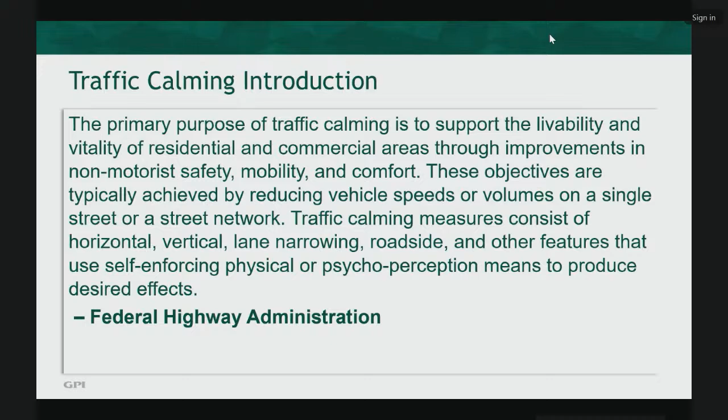I just want to take a moment to start with a brief introduction to traffic calming. Up here is a definition by the Federal Highway Administration on their definition of traffic calming. Different agencies will give a varying definition, but in essence, what I like to synthesize is that traffic calming is the different techniques or methods of slowing vehicles down within residential and commercial areas. The reason why we want to do this is for safety reasons. The Federal Highway Administration has extensively done research and proven that based on vehicular impact speeds to pedestrians, the higher the speed, the greater the impact and injury to the pedestrians.

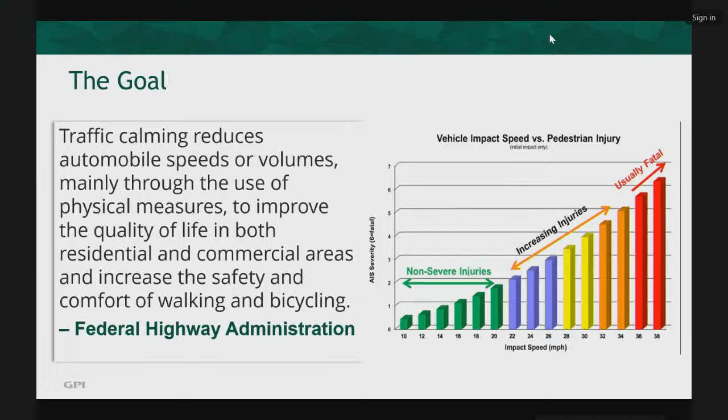So for this project, the process starts with identifying our project limits. From there, we gather our existing data and then use a metric to evaluate the data, and from there, we assign priorities to locations using the data, and then evaluate all the different traffic calming strategies. From that pool of strategies, we provide recommendations for each location based on our findings.

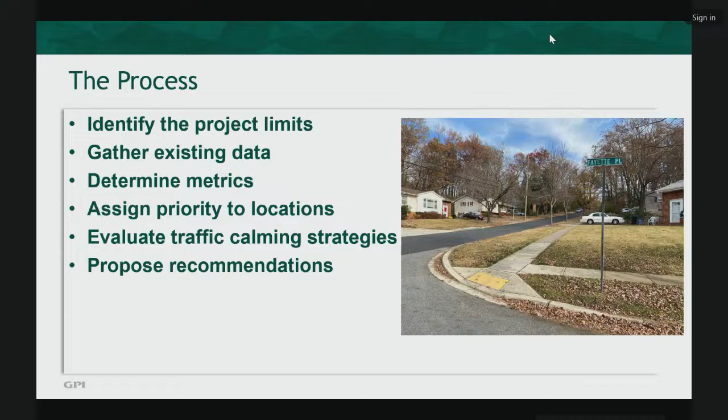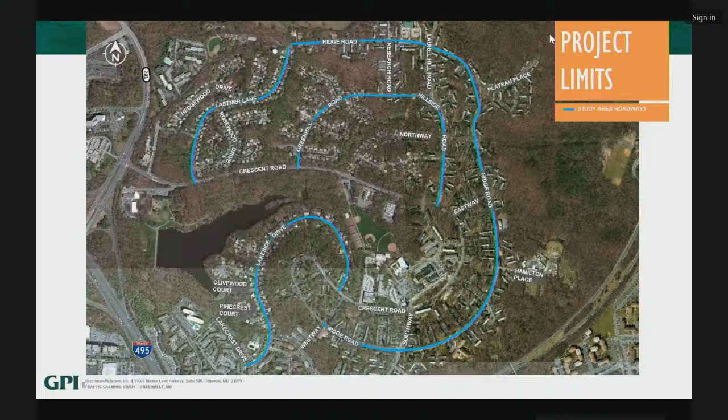As I mentioned earlier, our project is along Lastner Lane, Green Hill Road, Hillside, Lake Crest, and Ridge Road. In this slide, you can see all these roadways outlined in blue. From there, we broke it down into modular pieces and used an alphanumeric ID to assign locations, identifications to further evaluate in this study. We start with 4A and end with 8B.

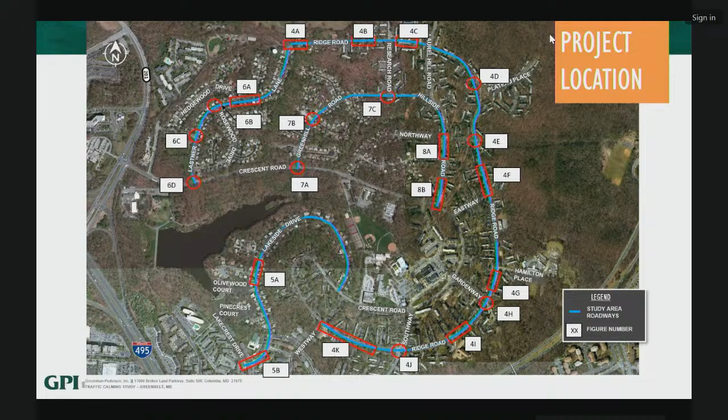This slide represents the data we collected for our research. We laid down automatic traffic recorders, or ATRs, along the different roadways to collect the average daily traffic, or ADTs, and the 85th percentile speeds. The ATRs can be identified by red lines along the blue roadway sections with callouts to their respective ADTs and speeds.

The 85th percentile speed is the observation of vehicles traveling along this section of roadway where 85% of drivers were driving at or lower than the speed posted. So if the speed was 29 miles per hour as our 85th percentile speed, that would mean 85% of drivers through this section were going at or less than 29 miles per hour. It is not the average speed.

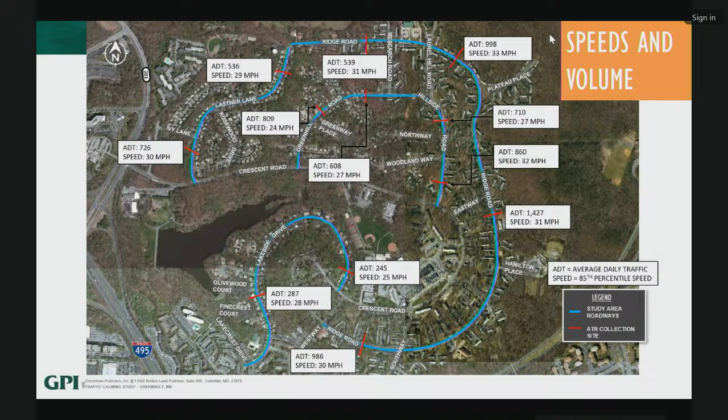This slide represents the number of collisions collected over a 4-year period from 2019 to 2023. The data was provided to us by the City of Greenbelt, organized based off reports and the addresses where incidents occurred. Locations can be identified with red circles, where collisions happened at intersections, or along stretches of roadways outlined in red. These collisions vary from pedestrian injury to property damage and hit and runs, and are lumped together along these red sections of roadway.

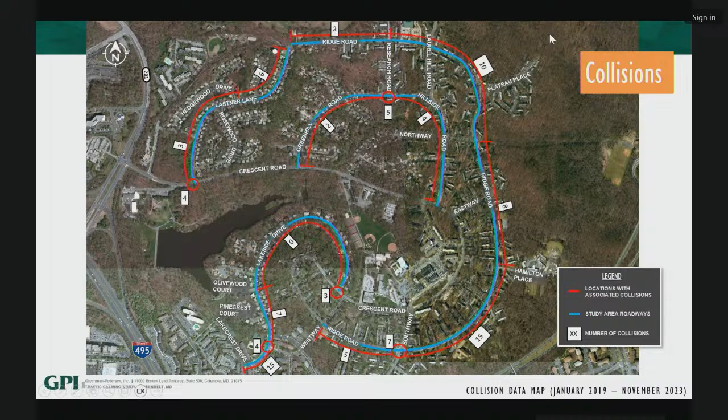Question on that page? Sure, so it looks like on the previous one... so that's the 85th percentile travel speed. So that doesn't take into account what the speed limit was at all. Or are the speed limits the same on all the study stretches? Okay, so there's no differential there then. Okay.

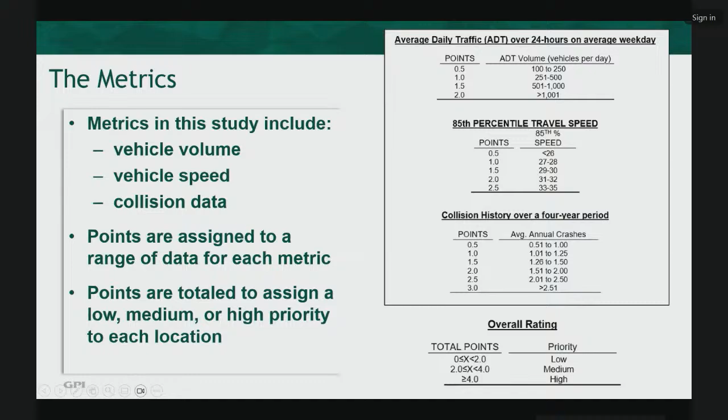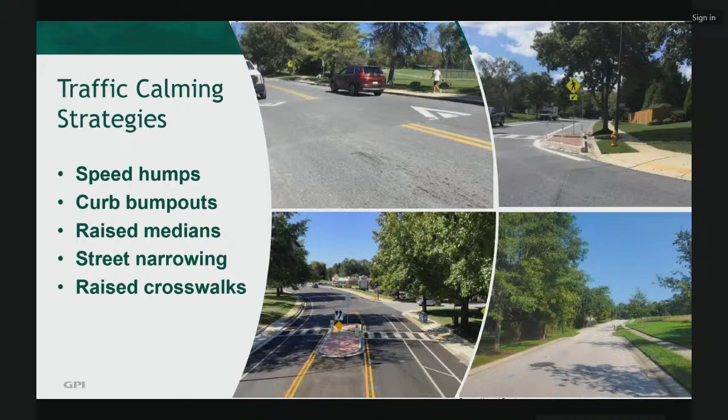Here we're recommending we reduce the lane widths along Ridge Road to allow drivers to travel at slower speeds, because wider roadways tend to promote higher speeds of travel. With roadway narrowing, drivers tend to be more cautious. In addition, we're also trying to realign the existing crosswalk that is currently at a diagonal direction, since it's much more conducive to pedestrians if they walk in a perpendicular path.

In combination with that, there would be a bump out along those crosswalks to allow pedestrians to cross a much smaller distance, so they're not on the roadway as long, as well as bringing up the stop bars on both Ridge Road and Lastner Lane. This would allow drivers to complete their turning movements at a quicker pace and not linger in the intersection as long as they have to. In addition, we also have some sharrows to promote bicyclists to share the road.

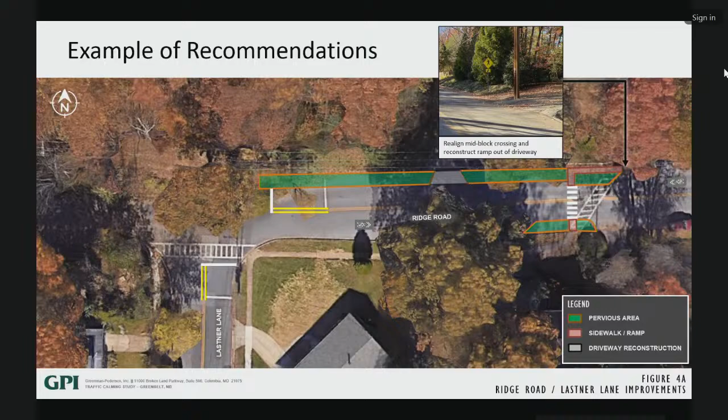Beyond this slide, we are also going to be showing the different locations along the rest of the report. I think now would probably be a good time for general questions, and then we could go through each one. It's a bit laborious to go through every location, but having the boards here also didn't make sense because folks online wouldn't be able to see them. So maybe general questions, then we can go through each of the recommendations in the order in which they appear.

What are the yellow lines on the previous slide? These yellow lines, the double yellow? With the extension of the stop bar, the double yellow lines would also be extended toward the stop bar. Oh, so those are existing double yellow lines that you would extend out? Yes, for clarification, the much brighter highlighted yellow are proposed, and the aerial imagery shows the existing double yellow, if you can see it. It is a little hard to distinguish sometimes.

Thank you. And so the reasoning behind moving those is you're putting the stop sign closer to the intersection. Is that the idea?

Looking at that slide, the crosswalk bars on the right-hand side look like they've been changed so it's perpendicular instead of diagonal. Is that correct? That is correct. Is that a consistent recommendation, or are there some intersections where a diagonal crosswalk is preferable? I believe perpendicular is more recommended, so you're shortening the path to decrease the amount of time pedestrians are in the intersection, and by narrowing it you're putting them in better sight of visibility for safety as well. In the Continental style, I don't know if you're talking about the actual lines being perpendicular - that crosswalk striping is the common standard now, called Continental. So it's about the alignment as opposed to the format. Got it. Yeah, I think you will see that alignment.

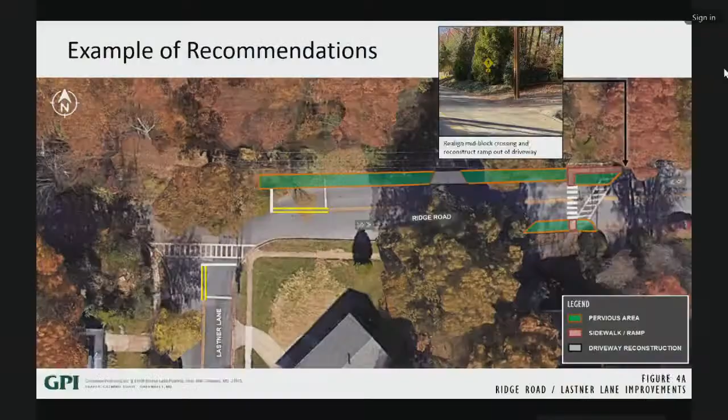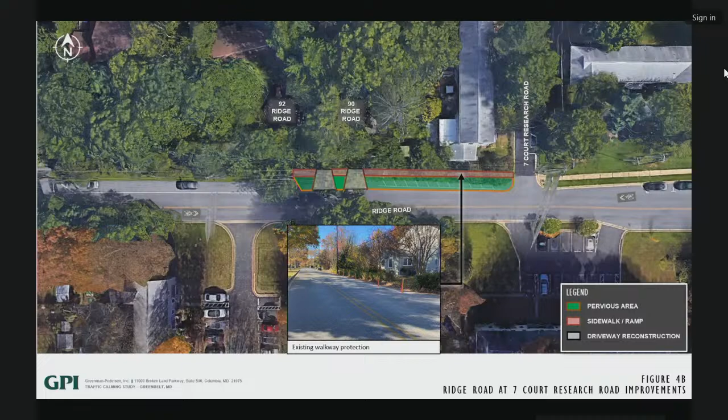This one is Ridge Road at 7 Court Research Road. We use the same color schemes for many improvements; it's just a matter of location. We're proposing to remove some parking and narrow the roadway down, as well as providing sidewalk, where right now there isn't much of an existing sidewalk.

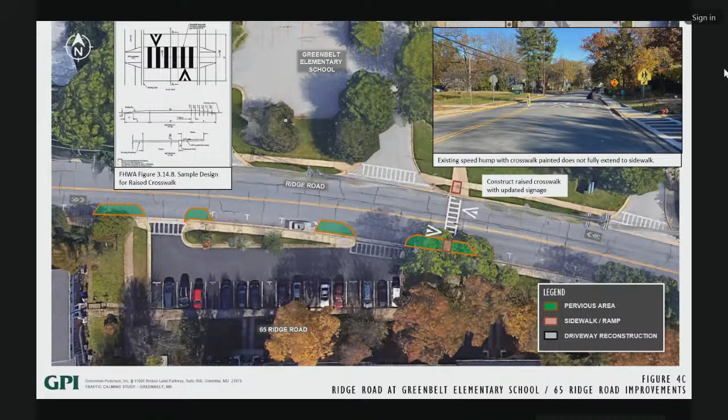This one is at Ridge Road at Greenbelt Elementary School and 65 Ridge Road. Curb bump outs are proposed, as well as crosswalks with striping and sidewalk. Up at the top left, you can see a schematic of a raised crosswalk.

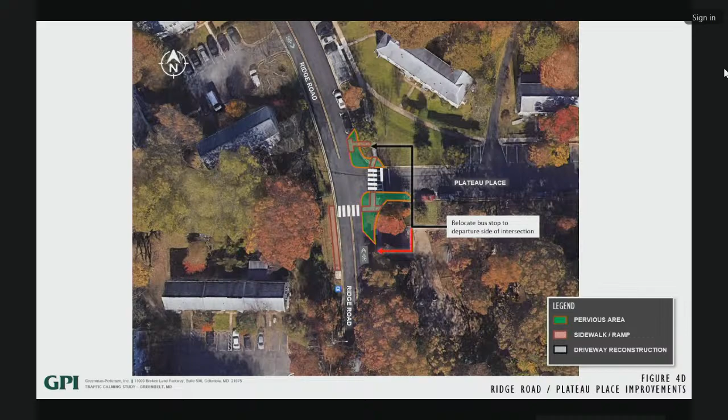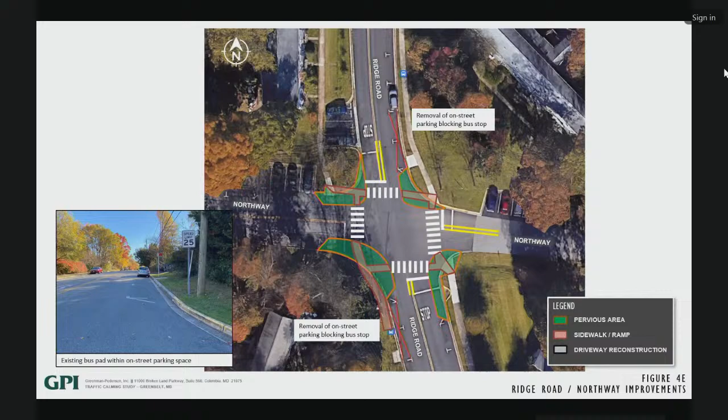This is 33 Ridge Road improvements, which I believe we've already submitted earlier, and I believe is in implementation, right? It hasn't been implemented yet, but it was part of a previous study, yes - a sight distance study that will require some parking removal to clear sight distances from the driveway there.

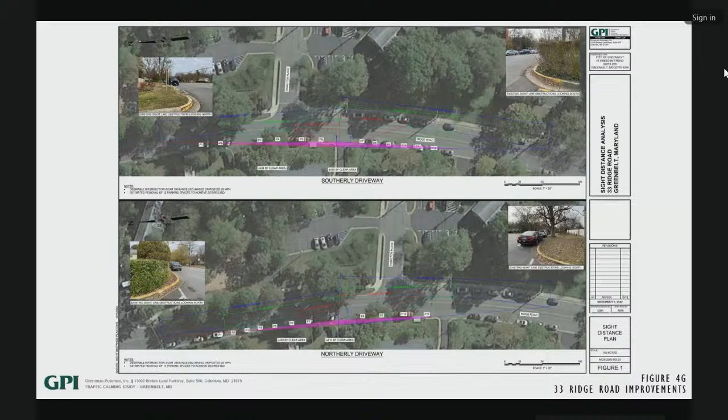We are at Ridge Road and Gardenway improvements. We have curb bump outs being proposed with an addition of sidewalk reconstruction to allow pedestrians to cross at a shorter distance, extended stop bar as well, and some removal of parking along Gardenway.

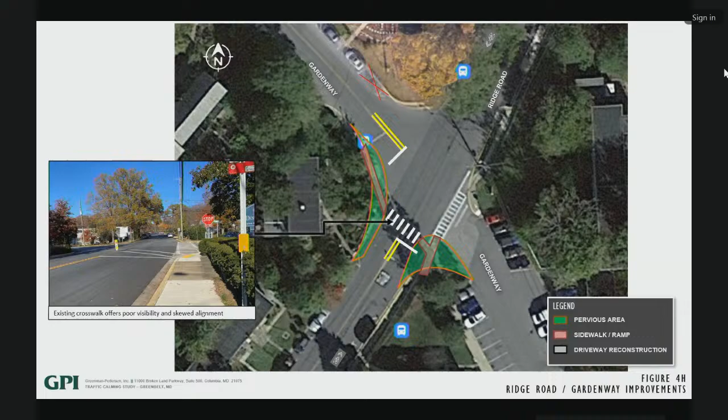This is 21st to 24th Court Ridge Road improvements. Again, we have several curb bump outs as well as crossing striping for pedestrians.

This is Ridge Road at Southway improvements, where there are a number of curb bump outs being proposed, as well as several refuge islands for pedestrians to be able to cross.

Could you go back to the last slide real quick? Sure. Okay, thank you. I did want to point out on this one, there is a recommendation to remove the current traffic signal and replace it with a rectangular rapid flashing beacon. That traffic signal is very much out of compliance with current standards, so that would probably be a longer term recommendation, but I just wanted to point that one out.

You say it's not in compliance with modern standards - is the red, yellow, and green the wrong shade, or what? No, it's actually just being used as a pedestrian crossing device. It doesn't change for vehicular traffic. So using an actual pedestrian crossing device like an RRFB, a rectangular rapid flashing beacon, would make a lot more sense than having a full signal there.

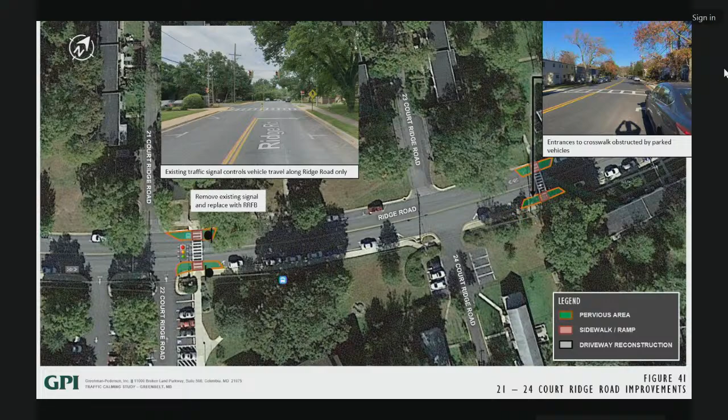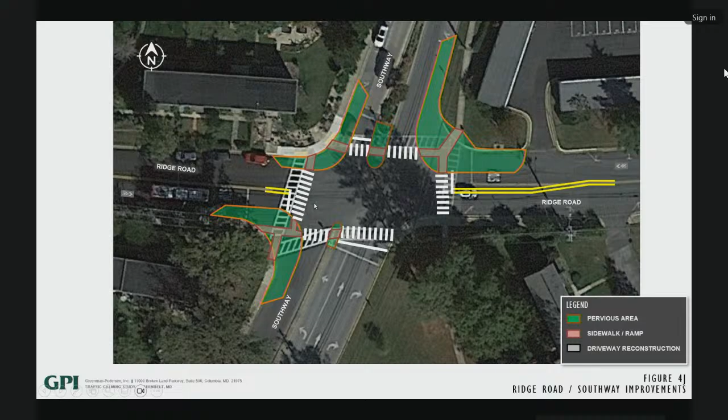Southway improvements where there are curb bump outs, extended stop bars, additional sidewalk, and striping. Here we have Ridge Road between Southway and Westway improvements. Again, you'll see curb bump outs, proposed striping for crosswalks, stop bar extensions, raised crosswalks as well, and some reconstruction of some ramps.

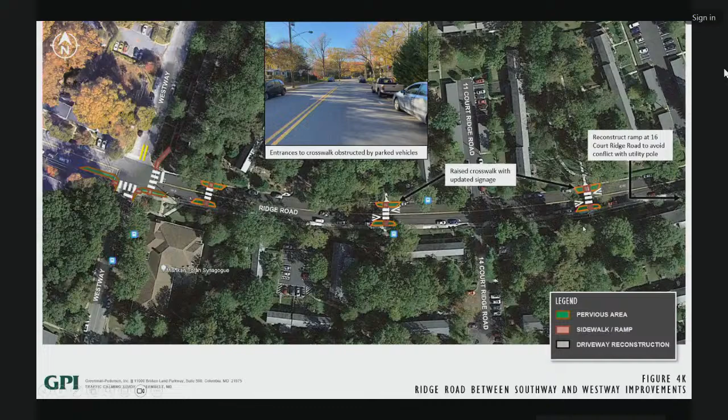On Lakeside Drive, with the proposal for the sidewalks, the easement or right-of-way - does the city actually own the land that the sidewalk would be on? That would all be part of the engineering study.

Are you proposing stop signs instead of the yields at the tops of each court there? As of right now, no. Actually, I think we do for the side roads, not along the main road. So we're getting requests for that too, which is understandable.

Here we have Lakeside Drive from Westway to Lakecrest Drive. We're proposing a median due to the width of the roadway. Once again, narrowing the roadway gives drivers the perceived effect to slow down.

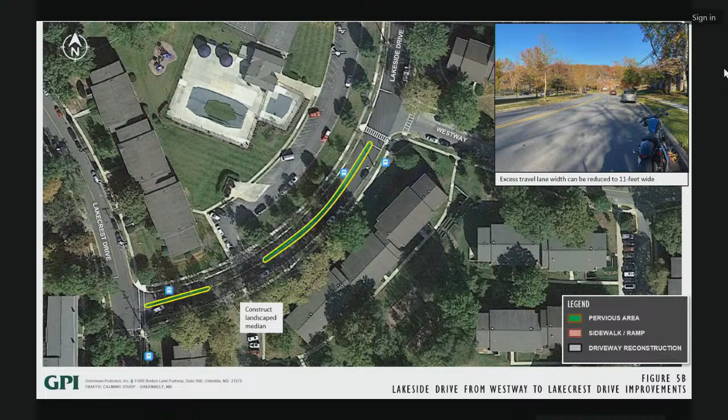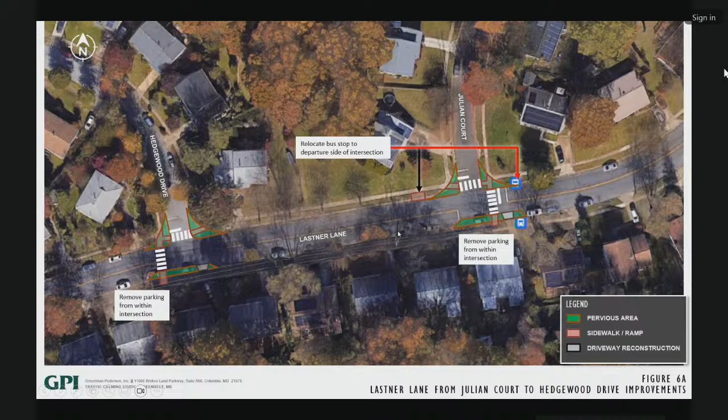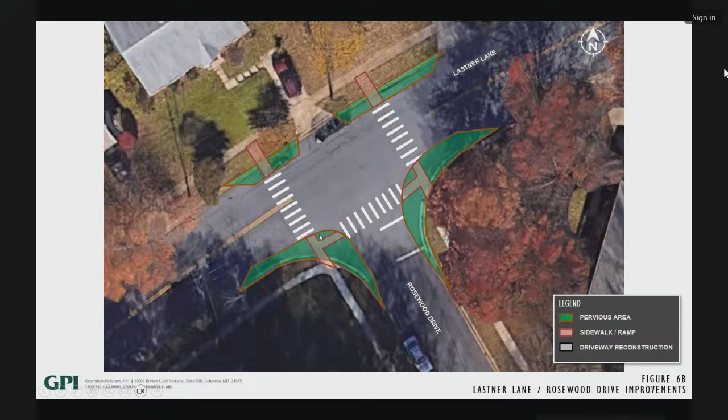There's Lastner Lane at Rosewood Drive. Similarly, curb bump outs are predominant with extended sidewalks to narrow the gap for pedestrians to cross.

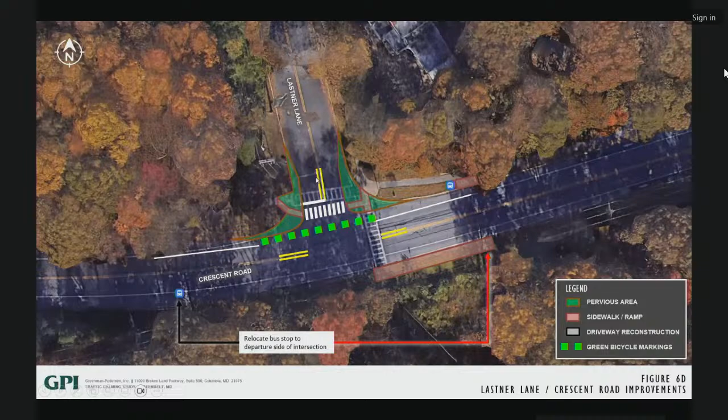Here we have Lastner Lane at Crescent Road. We have the stop bar being extended forward, along with curb bump outs, sidewalk, and possible green bicycle markings along Crescent Road.

I was just thinking the bump outs are colored green, but it would be interesting if they were actually green. But the proposal isn't making a statement on the color, that's just a way of showing it out. But if they're green, they would certainly stand out. I definitely agree. Right now, this is the ultimate location, and we are hypothesizing that it could possibly be grass. But in the short term, you could use bollards of some sort as a temporary or short-term solution to see if it was effective.

We don't have a real good record with bollards, I don't think. I've seen a lot of bollards getting flattened around here. So obviously, it's preferred to have grass because it also helps with stormwater management and drainage as well. So it's more beneficial, but it's more extensive construction, so it would be costly. I would hope this is not all concrete. That would not be our recommendation. It'd be more aesthetically pleasing to have grass.

Mayor Pro Tem: So the idea is that you're just extending the existing curb and putting the grass in there. I wonder also, is there anywhere that's done artistic painting to narrow it visually at corners like this, as a preliminary thing, even without the plastic bollards? I think I've mostly seen it along a long stretch, not at a corner. Yeah, there's definitely no standards for that, so it would be something we wouldn't be able to follow the MUTCD manual for, but I've seen it as well.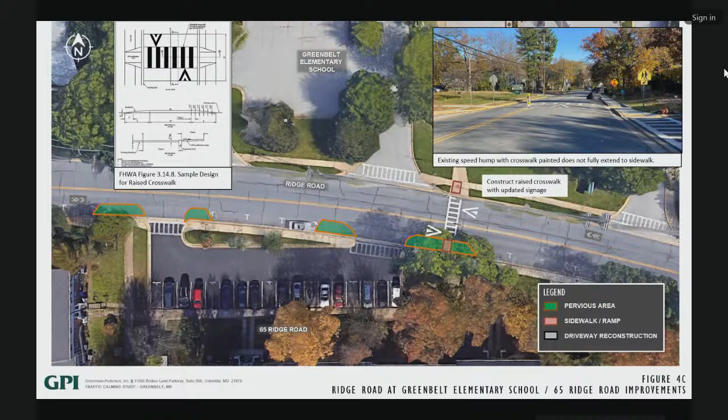Can I ask two other questions? When you were talking about the light in front of Greenridge House, I think Ms. Ferrer was talking about that. Does a stoplight slow down traffic more than a flashing light would? I know we have a lot of people crossing there to go into Greenridge House, and I don't know if your study looked at whether a flashing stoplight slows people down more than an actual street light.

Even if the street light doesn't really change, if I'm driving down there and I see a street light, I'm already thinking that light might change, versus a flashing light on the side of the road, which takes longer to notice. You're automatically going to slow down because you know a stoplight is there, but it takes longer to get to an actual flashing light since it's on the side of the road. So I'm wondering if people would slow down more because the stoplight is there. We have a lot of seniors crossing there, and I don't know what the data says, but that's my question.

As engineers, we're required to follow the MUTCD. That device is not compliant with the MUTCD — you would not be given permission to put that device in, since it doesn't meet any of the criteria to be installed at that location. So that's the basis for their recommendation; it's not about whether it's effective or ineffective, just whether it meets adopted road standards. To add to that, the recommended treatment, the rectangular rapid flashing beacon, maybe we could show a graphic of it.

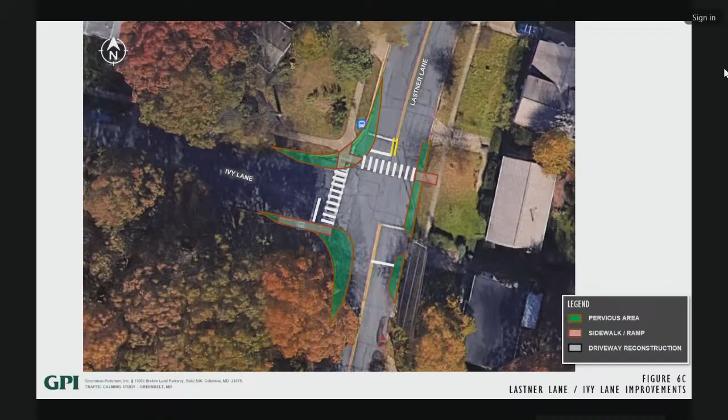I believe we looked at that once before, we have an issue with driveway aprons. Yeah, I think there's a driveway right there, isn't it? It's been problematic at that location, trying to improve the crossing. So that's why we put the flashing stop sign in. But we can certainly look at it again, I'm fairly certain there's just some impediments. I just asked because I'm very aware that people just dart across.

There were a few other public comments that asked for more crosswalks where they see people crossing at the wrong spots. If there's not a receiving end of sidewalk, we can't promote crossing at those areas.

Right, okay. And then I wanted to go back to the Lakeside Drive section where you were adding the sidewalk in between. This one, yeah, I'm just wondering why only sidewalk here in this section of Lakeside Drive, because there's no sidewalk for the entire length of the neighborhood. So why just right here do we need a sidewalk?

I think this one was twofold. It was to also work as a narrowing, and because these two courts were one of the only areas that weren't connecting safely to the inner trail network. So that would give them the ability to come to, what is that, Maplewood?

Was there any consideration given to putting sidewalk throughout that neighborhood? A lot tighter. This is the only area I think that it seemed feasible enough to fit within the roadway that was there.

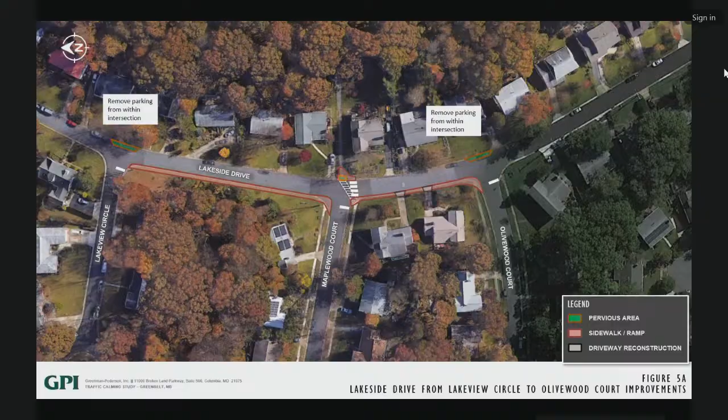Okay, I have a couple of general comments that dovetail with some of the points Councilmember Pompi just made. In terms of the study and these slides, it doesn't really take into account the topography. For example, over on Garden Way and Ridge, that intersection is actually on a hill and it's kind of steep. So with the sight line, if you're a pedestrian coming up going south toward Ridge, you can't really see around the corner, and cars can't see you too well either because it's a hill. So I think sometimes these slides don't tell the whole story.

Also, along the same lines, where the proposal is to remove a parking space, it's not just the parking space that's sometimes obstructing the view or sight line, it's the landscaping. So as staff, as we're discussing these safety improvements, I think we'll have to negotiate with GHI on some of the space removals and the landscaping. The hedges are a little tall in some places. I know there are standards, but sometimes the hedges are a bit taller than that.

So just general information, GHI, in the courts, there's parking for enough cars. The standard is what, 1.5 cars per unit? Oh, the standard within GHI varies depending on location. Yeah, I mean there are some courts that don't have parking, there are some that have visitor parking and so forth.

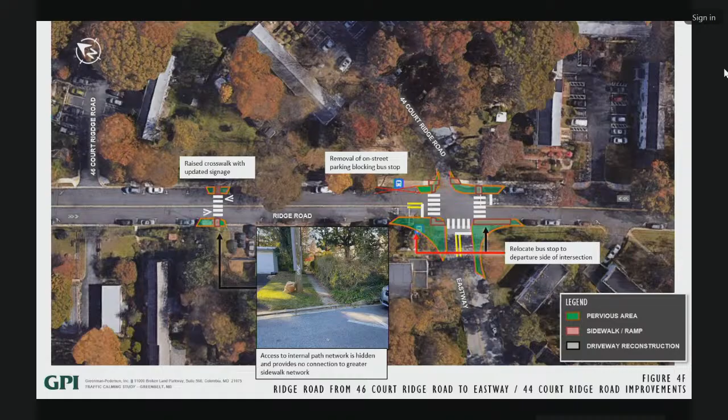Greenhill, and Hillside also, we haven't gotten to those slides yet, but Hillside is getting them as well. I definitely hear you, and if there are particular connections that would be helpful, that would be great feedback, because we definitely can't do all of them.

If it's just a crosswalk, it's not that expensive. In general, for instance, the crossing of Hillside and Northway, there are stop signs, but absolutely no markings on crosswalks. I would say that's helpful. When a driver sees a crosswalk instead of just a stop sign, does he not stop more?

We do have some, we're getting to that one, we haven't gotten to that slide yet. But we are adding some there. Thank you very much. So let's keep moving along.

There was one question that actually would have been better to address earlier as a more general question. This is from Heather Blomhard in Greenbelt, asking about Greenbelt East, specifically about the background on how this study was scoped and why it was just this area and not other parts of the city.

She has some concerns about Hanover Parkway. The speed limit there is 30 miles per hour, but often drivers go at unsafe speeds, weaving around folks turning into the shopping center, medical office building lots, or residential areas. In theory the traffic circle should force drivers to slow down, but many seem to take it as a challenge, making it feel unsafe as a driver, let alone a pedestrian.

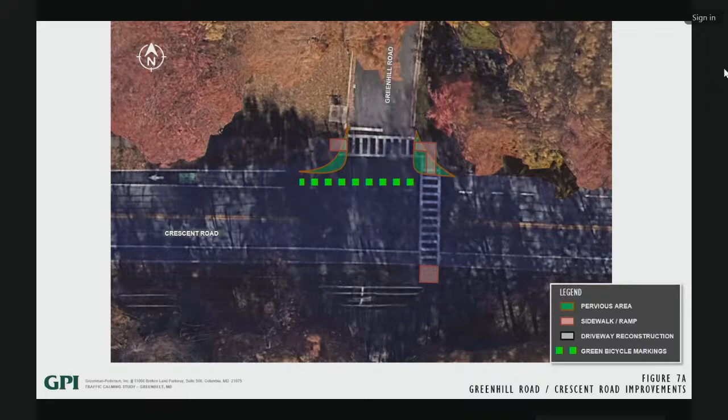Yes, please, continue along. So this one's Greenhill Road at Crescent Road. Similarly as the previous proposed improvements, we have curb bump outs, green bicycle markings, as well as extended sidewalk and sidewalk ramps. Greenhill Road, Orange Court, and Greenway Place.

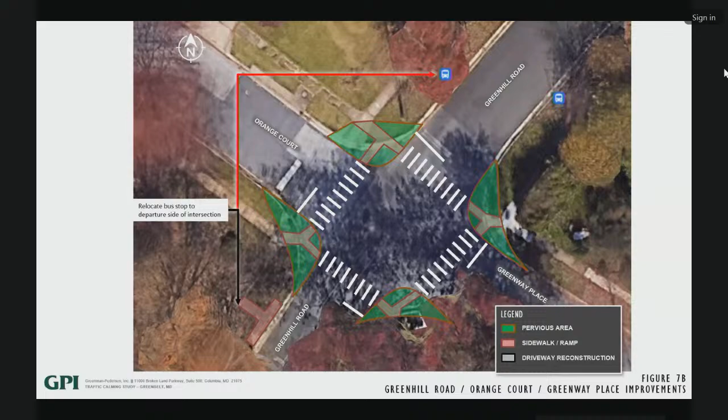This is also demonstrating the same curb bump outs as well as extended sidewalks, and of course the pavement markings and extended stop bars. Here we have Green Hill. I usually have one of my campaign signs right there on that spot, so we'll have to change that.

Here we have Greenhill Road, Hillside Road, Research Road, again, with more curb bump outs and extended sidewalk ramps being proposed, and striping for the continental crosswalks.

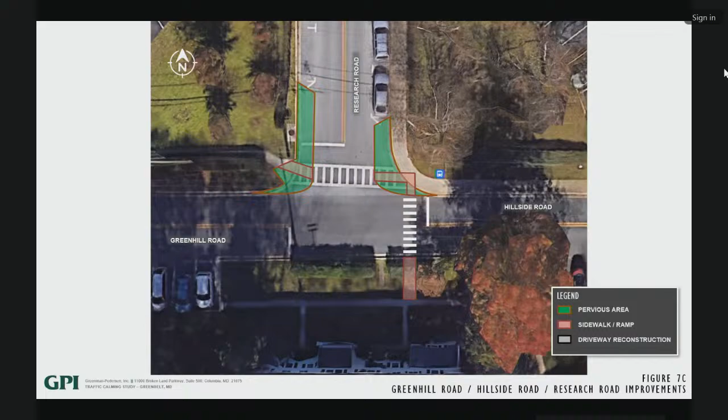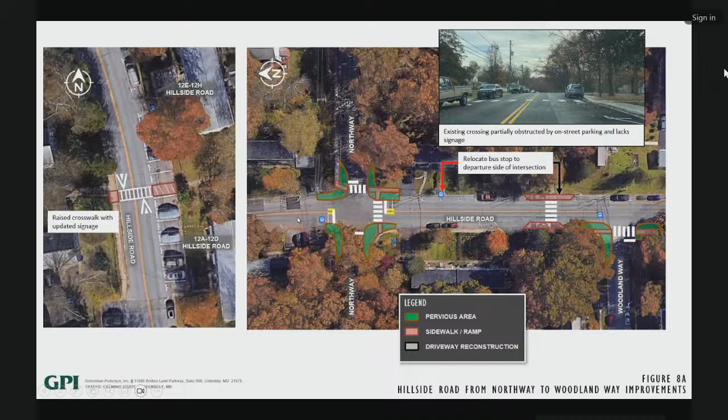Yeah, this is one of the locations where the inner walkway from an underpass emerges right where that bus stop is, and you're just kind of left there to cross the street. So I appreciate Ms. Gournay's points.

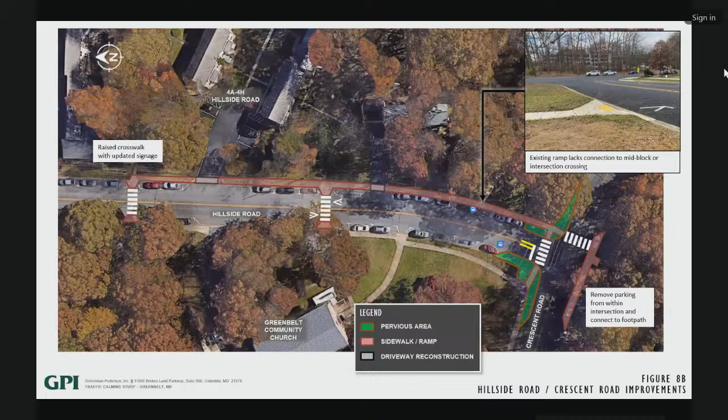I would add, so the crosswalk that you see showing as raised here is actually going to be installed as part of our ARPA funded projects, but not as a raised crosswalk. Staff did determine that that was the better option rather than the one by the bus stop that's very close to the intersection, and having two crosswalks that close to each other can really present more of a threat to a pedestrian than not.

A similar conversation or analysis on Southway and determining which of the three crossings, or the three connections, made the most sense for us to install as a marked crosswalk. And so that's why these two are picked rather than the one by the bus stop. But ultimately, in the long term, this sidewalk would connect you to the bus stop.

So the crosswalk that goes across Crescent, that's like right above the overpass, and there's no place - what is that supposed to connect to? Is that new sidewalk there? That's a new sidewalk beneath it, or along that stretch, which it looks like would connect to this sidewalk down here. I'm not sure where it would connect on the other side, though.

I think the intentions were to remove the parking from that area because it's unsafe in the intersection. We can confirm the crosswalk connectivity - there, most people use the underpass and don't cross the street. So you might want to put an asterisk by there.